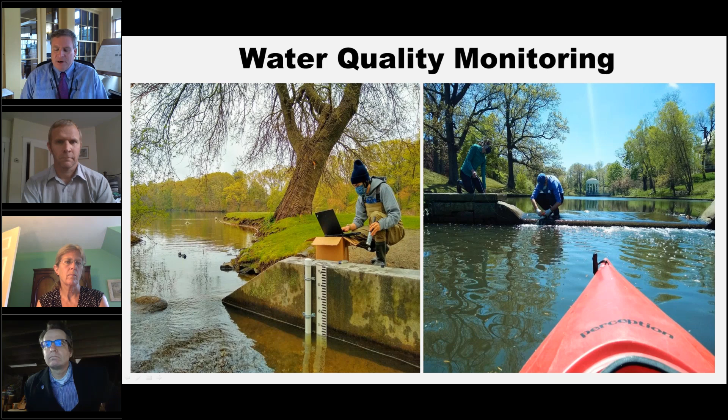Innovations in stormwater design. We want to know what you all are dealing with. If you're a landowner or a municipality, we want to know what you've done in your backyard or in your park to create better stormwater management. That's what it is, collaboration. We want to bring everybody's ideas together, talk with everybody about what they're doing, what they see. Send your information into us, and we'll bring it to a common place that's globally available to everyone. Then if you get a consent agreement, you don't have to start from square one. Hopefully we can get you to square 10 before you have to start your projects.

On the slide you're looking at now, to the right is the seal house. Way back when, Roger Williams Park Zoo had housed their seals and sea lions there, but the building cantilevers over the waterway. So a lot of our monitoring equipment is mounted inside this building, going right through the floor into the water below. It's a perfect setup for that type of testing, and it's been very successful. When they built the building back in 1893, maybe they had stormwater in mind, I'm not sure.

That will be a kiosk, not only for research, but for outreach to the public, for education. We'll bring students into the seal house, show them how it's working. There'll be video screens running with some of the stormwater things we've done and how they work.

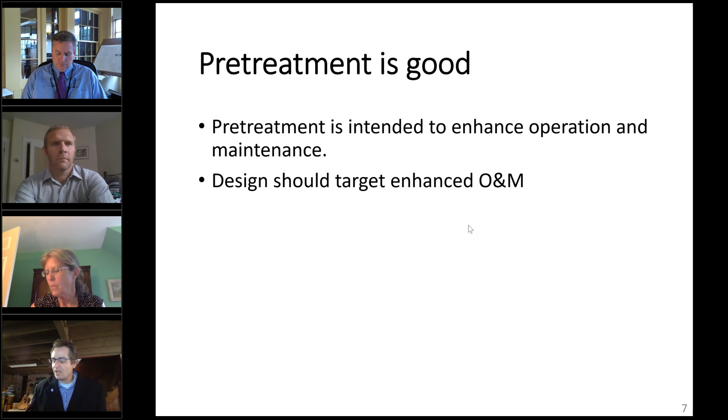So we've begun, in the scientific community, to become more flexible with what pretreatment looks like, and back off on some of the more standard requirements that it's got to be structural, it's got to be some type of basin. So things like offline catch basins are really good as pretreatment.

And if that's the case, then these deep sump catch basins serve our purpose for pre-treatment. They're easy to maintain, you can vactor them from the surface, and they have at least a 25% removal efficiency for total suspended solids, serving the purpose of pre-treatment. We've made those arguments in the past, especially where sites are tight and you don't have the luxury or the real estate to implement large pre-treatment.

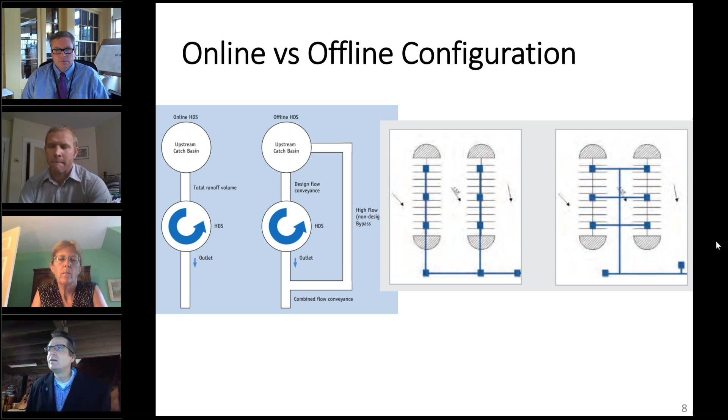If you're trying to maintain these street trees or tree filters in the cityscape, a lot of times they have grates that are difficult to remove, and oftentimes we don't have equipment for this. For the most part, our go-to maintenance is a Vactor truck, and you can't really do much with a Vactor truck here.

So this is one of the things that I think will happen over time. We are planning a maintenance course, and I expect we'll see innovations in maintenance tools as we understand the maintenance.

Right now, I think it's safe to say that in general, the go-to maintenance operation is just neglect. That's not everybody, but for the vast majority of stormwater treatment systems, I've written a bunch of operation and maintenance plans, and I know exactly where they go when we hand them over.

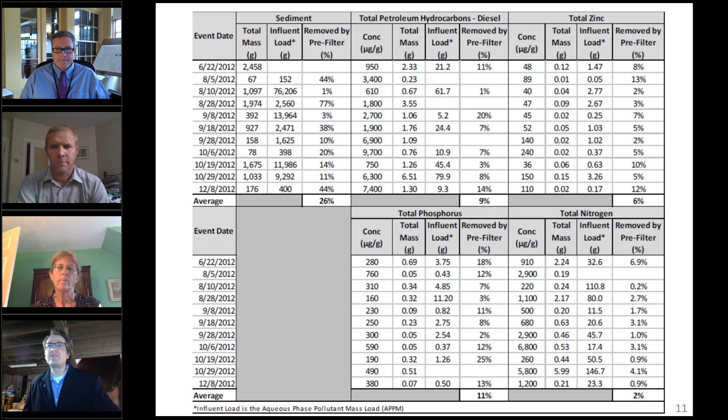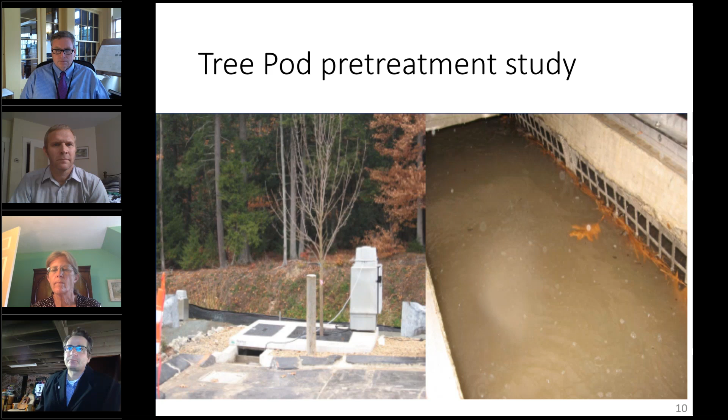So I'll move into, essentially for this, I am only going to be focusing on the enhanced treatment systems, what we would call filtration and infiltration best management practices or stormwater control measures.

For the most part, as we enter into the 21st century, if the state manuals haven't gone there yet, many of the local requirements, and particularly if you're from Massachusetts and New Hampshire, we have the pleasure of not having primacy over the Clean Water Act. EPA Region 1 does, and they've written our permit for us, which has some pretty stringent parameters around requirements for stormwater controls. For the most part, while they don't do it explicitly, implicitly they're requiring filtration and infiltration BMPs because they're requiring increased removals of sediment, phosphorus, and nitrogen.

If you're in the stormwater game, you've probably witnessed in your career this transition from a huge focus on TSS and sediment to now a larger focus on bacteria and nutrients, so nitrogen and phosphorus. We're a long way from where many of these manuals were written, and most water quality guidelines now focus on nutrient control. If you're coastal, it's nitrogen. If you're inland, it's phosphorus for the most part.

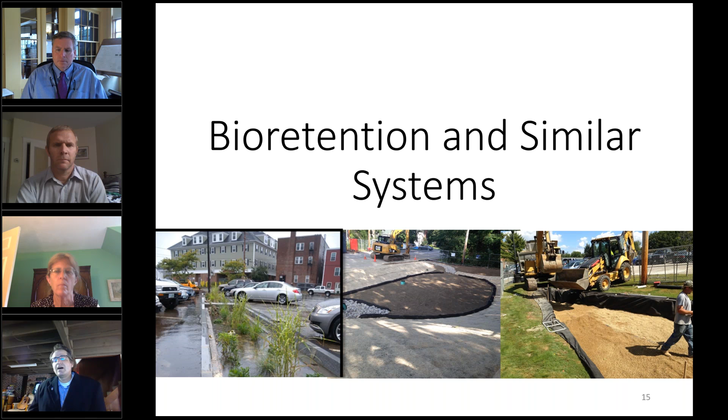Bioretention, I think, are the primary systems we see from a filtration perspective. Again, it's important to note that filtration systems are typically volumetrically sized, and they can infiltrate, and they may not. So they're versatile in that you can put them in areas where you wouldn't put infiltration systems, say areas with concerns about contaminated groundwater, or concerns about the general geology - it might be karst, or if you're in Pittsburgh, you're concerned with acid mine drainage, and nobody's putting water into the ground. In this case, these systems would be lined either with a compacted soil liner or an HDPE liner, but you still get the filtration function.

If you're putting a bioretention into a good soil and anticipating a lot of infiltration, that infiltration will really dominate the performance of the system. We see that the hydrology of these systems dominates the performance, and for the most part this is another area of research - there are lots of preclusions on infiltration, and for good reason, though there might be some over-conservativeness on that.

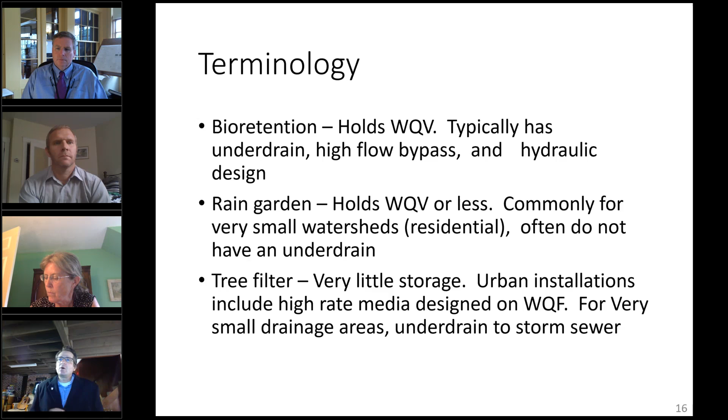So it goes without saying there's a lot of cooks in this kitchen. If you just Google bioretention design - and I do this routinely - you get 381,000 results in 0.03 seconds, and some of them are going to work really well. Our friends in Connecticut pop up very easily; they've got a really good, updated manual and standards. But you'll also see a range of different criteria. I don't know how many of them are tested. You have old criteria - some things work, some things don't.

So we're in a bit of a transition stage where we're replacing some of the old Maryland manual standards, because let's face it, for the most part, if you open the design manual from any state, you're seeing pretty much the majority of content that comes right out of the Maryland manual that Center for Watershed Protection did for Maryland, the birthplace of LID, 30 years ago. So not a lot has changed, although we're slowly updating the standards. But if you've been involved in updating a manual, it's not an easy task - you don't just write it and put it on the web.

All right, typically these are the components of the bioretention system. Again, you have a forebay - here we're showing a structural forebay. This is kind of like our own schematic, and cartoons are a little bit antiquated, right, because we're showing a structural forebay. I've already gone over the fact that we look at the forebay and pretreatment a little more flexibly now. It could be any pretreatment structure - could be a hydrodynamic separator, could be an offline deep sump catch basin. But whatever it is, that then goes into your main treatment cell.

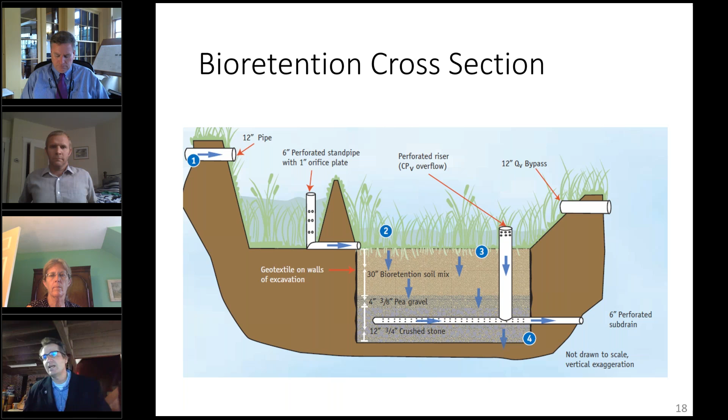Regardless, you have a reservoir, a place for water to store, and you can accentuate infiltration if it's routed through an elevated underdrain. So we play with the placement of the underdrains if we want to enhance infiltration. We do this even in soils where we don't anticipate a lot of infiltration, and I'll go into the reasons why later. There's really two reasons, and I'll cover that later.

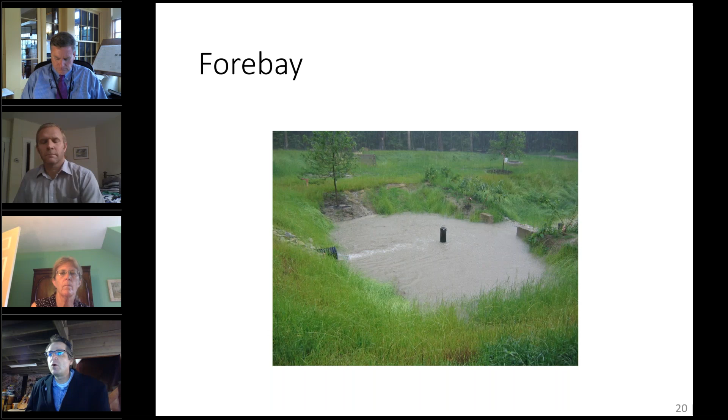So just cruising through some pictures, these are some of our early attempts at large structural areas that treat large drainage areas. This treats about an acre of impervious surface. We got rid of the forebay really quickly because we found it was very difficult to maintain, so we went for a low profile approach, not a huge structural forebay that was volumetrically sized. We just had a berm of stone that gave us separation and screening for the shopping carts.

We've also done some installations where we just have sheet flow into little bioretention planters. This particular one was done at a school as a way to save the playground. It actually was great A soil, but it had been compacted through all the little feet - think about recess, a bunch of mini compactors running around. It had really sealed off the top of the soil. You can see sparse vegetation out there from all that compaction and wear, and it just turned into a pond. So we put these little planters to intercept some sheet flow, and we gave the teachers their 20 minutes of free time, because when it rained and the playground flooded, they had to do indoor recess and didn't get their break.

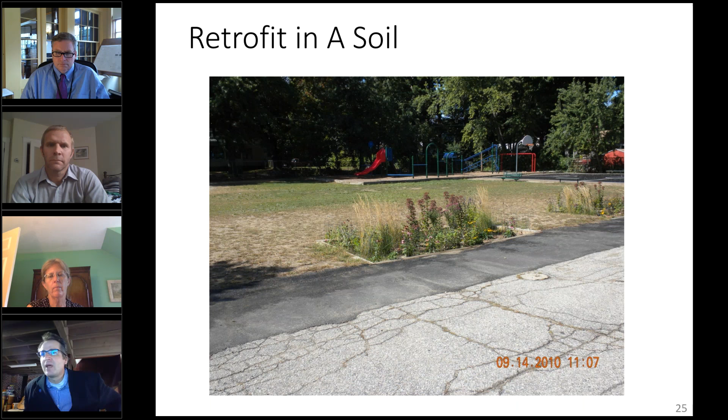Other things you see are these bump outs or curb inlets. This is happening a lot in large municipalities - New York, Washington DC, Philadelphia - putting these planters around the roadway. You can see here the issue we always see and struggle with: a very small inlet. We'll be hammering this when we do site tours at Roger Williams Park. You really need an aggressive slope because water does not like to change direction. It's cohesive, it likes to stay together. It does not take right-hand turns, so you really gotta coax it.

I love a drop inlet because gravity never fails. However, if you are having an at-grade inlet to your system, you have to make sure the opening is wide and the slope into the system is aggressive enough that water changes direction. This is a perfect illustration of what we see - this looks relatively new.

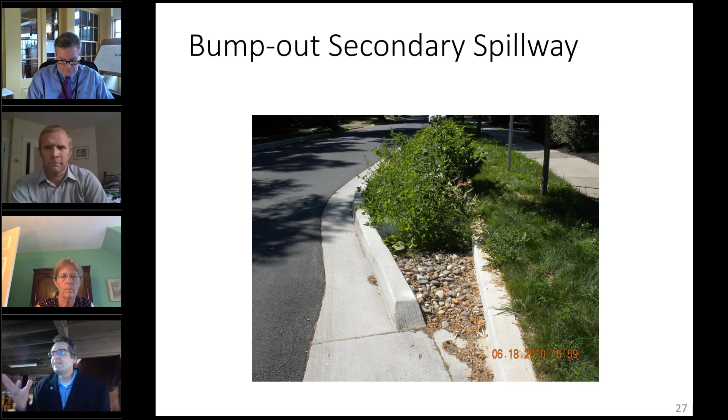That starts to intercept solids, debris, and creates a clogging front. My anticipation that water is getting into the system is very low. So these are very simple things that we can correct.

And the other thing here is, I can't really tell, but if I'm a drop of water, I'm looking at this grate and saying, that's where I want to go. I'm not looking at a huge turn, a 180-degree turn into the system.

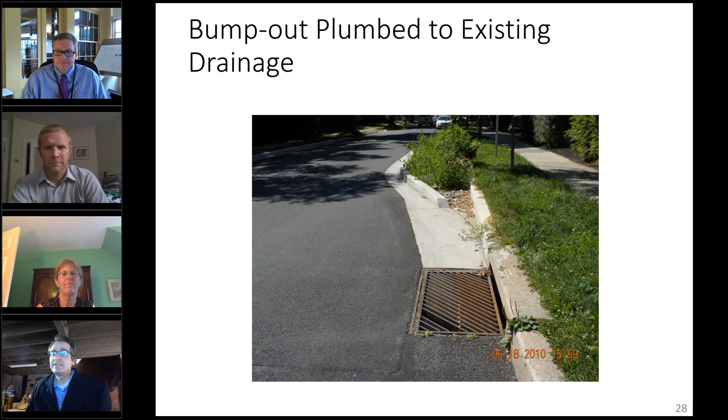Tree filters are out there. They are very simple in nature, and again, we're trying to do the research. Now, trees have lots of ancillary benefits. If I were to design something, I could not in my whole entire lifetime design something as amazing as a tree—something that produces its own food, sequesters carbon, provides habitat, releases oxygen. The list goes on and on.

However, we have not, in a stormwater application, pinpointed the exact functionality from a water quality perspective that the tree actually has. Obviously it's something, but again, the filtration component through the physical filtration through the media probably dominates the performance of these systems.

Tree specification as well is something that we're working on. Myself, we generally spec out a red maple. However, there are other trees out there that we'd like to look at—just not a lot of data here. We do have a publication that I'll link to you where we work with our urban forester to at least identify street trees that could be used.

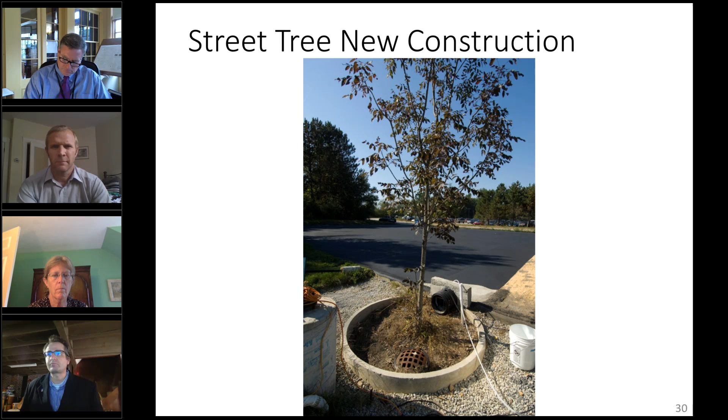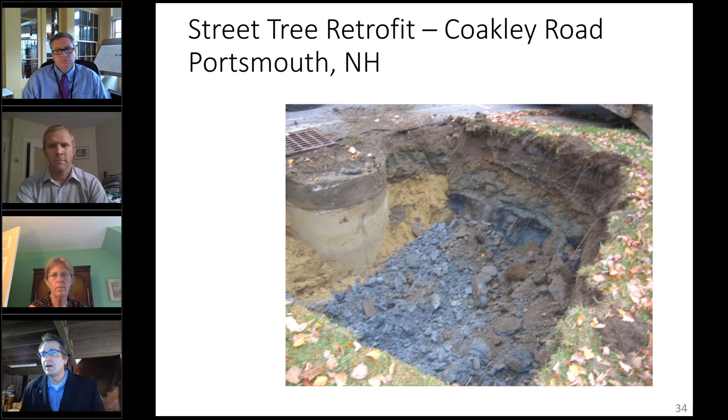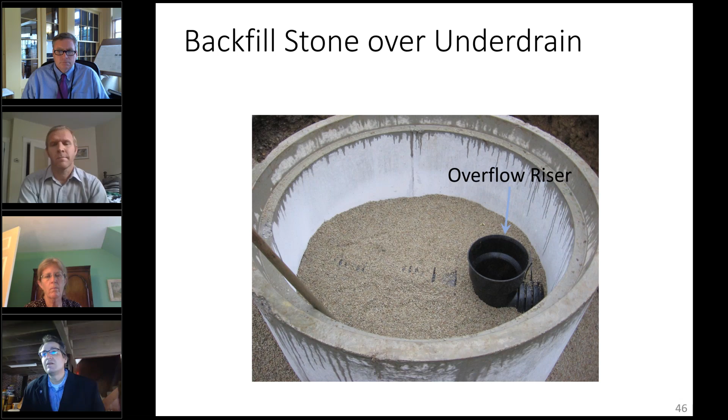And I just cruise through here. There's retrofit potential for these adjacent to existing catch basins. This is just an example of a very simple installation we've done, where we just dig out adjacent to an existing catch basin. We essentially backfill, or core into it, backfill with stone, drop what is basically a manhole riser, backfill that, connect it to the existing catch basin, backfill with stone, soil, provide our overflow riser, provide our inlet, plant our tree, and put a solid cover on the tree filter. We have done this in retrofit applications in order to enhance some water quality benefit into the existing landscape.

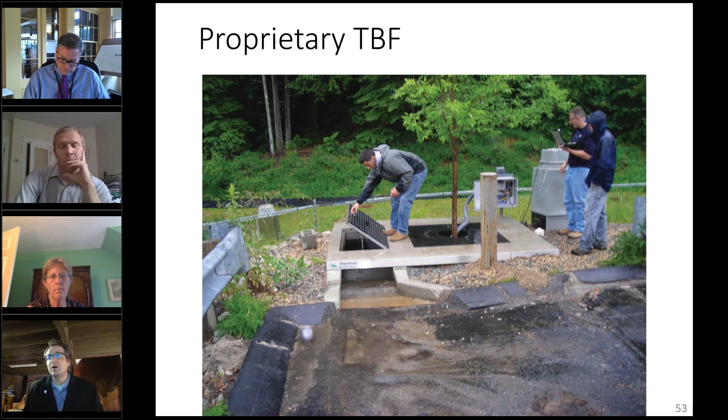And there are other proprietary devices that can do this as well. This in particular is a tree pod. We've also worked with cities to install large structures in the cityscape that again provide some benefit of a street tree, but also give an area for the tree to expand and grow and provide us some water filtration benefits. So those are just some examples.

Again, if you're using 0.05 inches an hour, this is not going to work out in your favor. But typically what we'll do is anticipate an infiltration rate and multiply that by 0.5, or take a factor of safety of about one half to build in some potential clogging. That is very, very conservative, I think, and you'll see why in a minute.

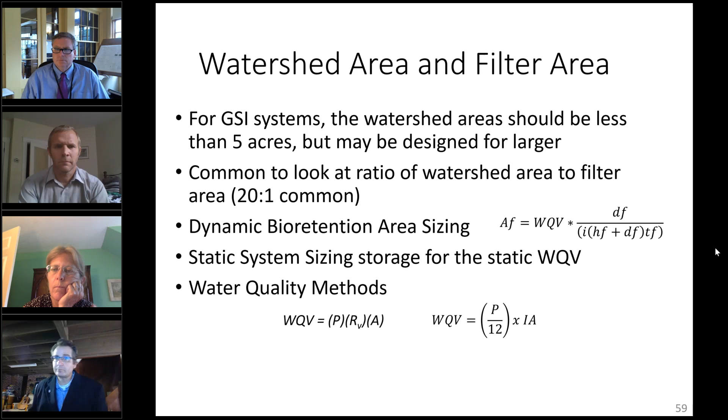So rights of ways, I covered this a little bit. In general, we're not putting these systems, if we're anticipating infiltration, in areas of high pollutant load, or we're lining them. There are lots of soil restrictions when we look at systems being installed according to some state manuals. I wanted to focus on slopes, because oftentimes we hear that these types of systems can't be installed in areas with significant slopes.

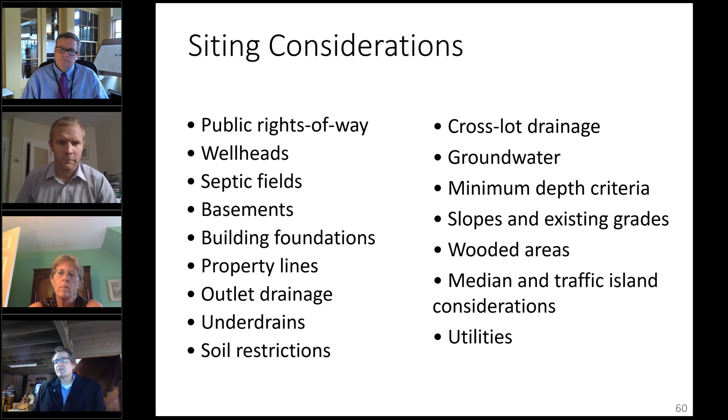We have installed them in the past. Generally, what we want is for the surface of the system to follow the landscape slope. Here, this is a roadway where we installed the bioretention. The top of the media follows the 3% grade on the adjacent road, largely to maintain a consistent system. Otherwise, if we kept the surface flat, we'd have a huge hole in the front and level out in the back, and we really don't want that—think cars being trapped in the bioretention system. Not a good photo opportunity.

So we like the top to follow the grade, but the bottom we design to be level, so the bottom gets terraced. While the top follows the grade, the bottom basically steps down. Here we have basically 3 steps down. The system is about 100 feet at a 3% grade. Every 33 feet, we go down a foot or so, and we just terrace it. So we have 3 basic bays here, and the bottom can remain flat.

We do that largely because what we worry about in terraced systems is concentrated and accelerated flow along the confining layer. The confining layer at the bottom of the system is where the stone meets the native soil. If you don't have restrictions there, you can get accelerated flow along that layer, causing pushing and piping and soil disturbance, which affects the integrity of our system. So you can terrace, or the other thing I've seen implemented is a geotextile, which does a great job at arresting flow—sometimes it's just a zigzag back and forth, backfilled with stone, creating a separation or internal check.

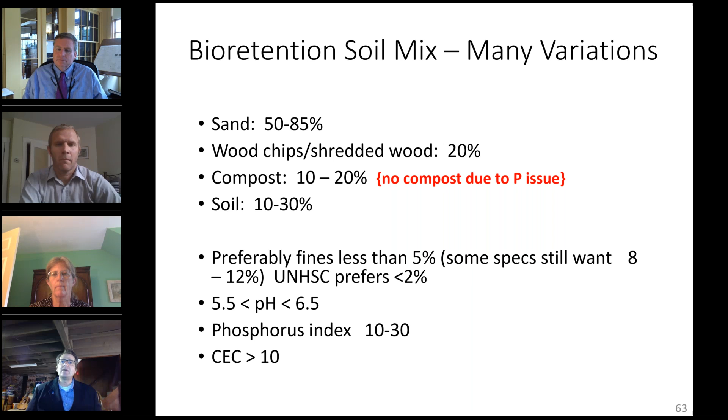And then we start to get kind of experimental with our compost loams and soil amendments. Sorry, I kind of skipped ahead of myself. Here's the particle size distribution we've developed. Again, this is on our website.

I might be able to show you that real quick. Let me see if I can do this. I'm playing with fire here. Playing with fire. Where did that go? No, I'm not going to do it, guys.

UNHSC, Google it, we're the first thing that comes up. If you go to our pub specs and info, we have detail on bioretention soil mix. It has some of the ratios and components, and also a particle size distribution that's a way you can test and make sure hydraulically that your system's going to stand up.

The last thing I'll talk about here is, I told you to get rid of geotextile in the vertical cross section, meaning the unmaintainable layer. If I put geotextile under 24 inches of bioretention soil mix, you're going to move heaven and earth before you get anybody to maintain that. You'll have to excavate your whole entire system.

Where this doesn't apply is when it's accessible or maintainable, such as in isolator rows in chamber systems. Oftentimes a woven textile is used in the isolator row, and that's fine. It does a great job of filtering. The woven textile is stronger and doesn't clog as readily as non-woven. We're finding it creates an organic humus on top as it removes organic debris and other things, which accentuates phosphorus removal.

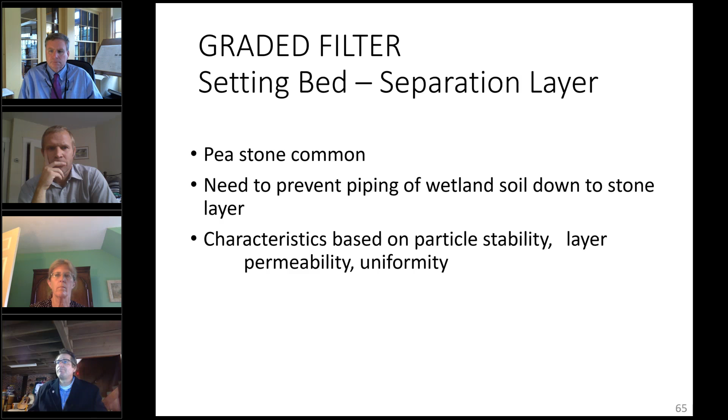What we use instead is a graded filter specification. This comes out of Federal Highway, and it's also used by the Army Corps of Engineers. It's basically an inequality calculation between your fine materials above coarse materials. If they satisfy these three inequalities, it can perform as a setting bed, meaning you can be relatively assured the fine materials won't pipe into the coarse materials.

Generally we use pea stone as an intermediate layer. So if we use a 3/4 inch stone or 2 inch minus stone as a reservoir, which is fine, we layer it with 3 to 4 inches of pea stone, a 3/8 inch stone, and that's worked really well as a setting bed. If you're not doing much reservoir, just use a 3/8 inch stone. If you got really nitpicky, a 3/8 inch stone has a void space of about 30%, and a 3/4 inch stone might have a void space of about 40%, so pretty much the same.

Now, amendments. Because of this phosphorus removal capacity and the lack of ability of these soils as we move them to higher flow rate and higher infiltration rate, that means we go from more organic material. If you think of a rain garden, a lot of it is 50% compost, 50% loam. That's going to have plenty of organic material, plenty of absorptive capacity, and it might even be leaching if that compost is not a low P compost. So what do we do? We don't want that happening in our phosphorus threatened waters. Now we have to look to some type of amendments.

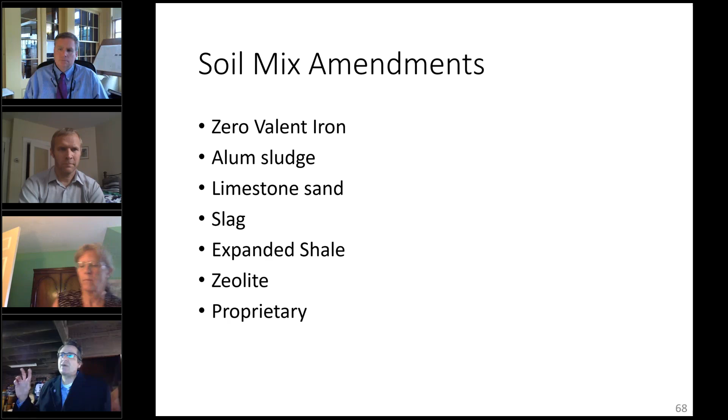So I'm going to cruise through this. This stuff is on our website, but these are some of the details for nitrogen. If you want to enhance nitrogen removal, what we're moving towards is what we call an internal storage reservoir.

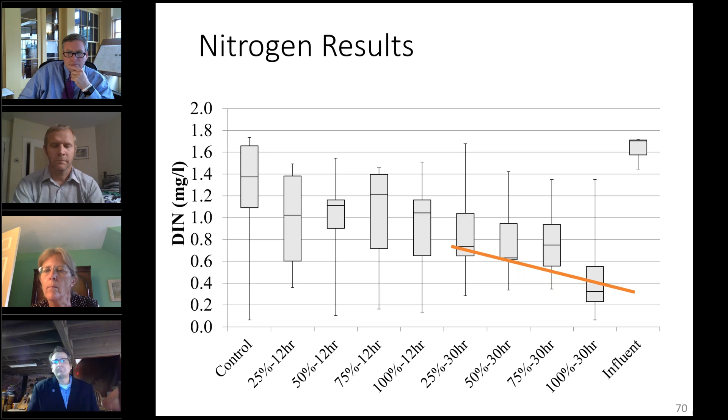So if we can hold it for longer periods of time, we get better removal, and we can shrink down the size of that internal storage reservoir. So we have a design specification for a hybrid bioretention system because we have nitrogen problems here on the coast, and so the criteria is enhanced nitrogen removal. And if you're in good soils, there's no way that you want to line that entire thing. So what we're building, and I don't think I have a picture of it, but again, it's on our website - what we're building is a first flow cell through what's essentially a subsurface gravel wetland in the middle of a bioretention system. I'll go over that a little bit more when we get into the gravel wetland.

We found water treatment residual and zero-valent iron to be the best. The slag and the limestone really didn't do much. We've also seen the use of expanded shale aggregate, and it all comes down to cation exchange capacity.

We've done studies on expanded shale, and what's interesting is they come from different parts of the country, and some parts have a higher charge than others. We found the stuff coming out of New York to be really good, with high cation exchange capacity and really good phosphorus removal. So something to consider: there are natural products that can be harvested and used that have this cation exchange capacity, which we're basically amending with the use of polyaluminum chloride.

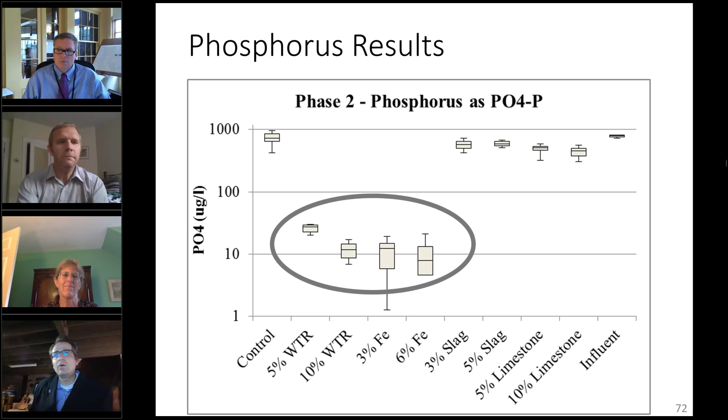Not to mention that it's a waste product. Again, if we can reuse it, the university and their drinking water treatment plant will give this to us all day long. So very good removal here. And then, like I said, we've seen about a 20 to 85 year adsorptive capacity with typical stormwater phosphorus loadings.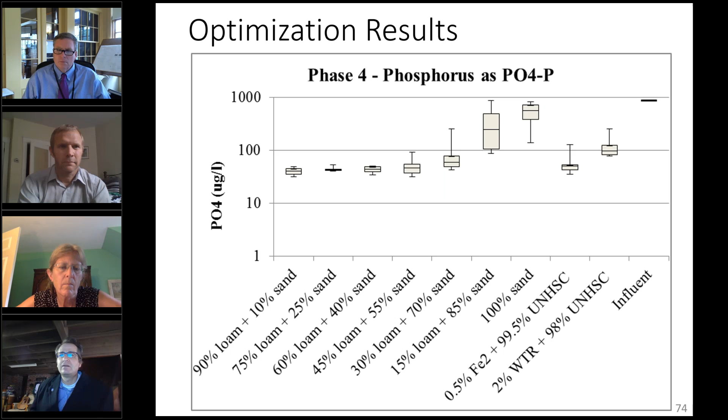Media thickness is often a question. Again, anywhere from 12 to probably 30 inches is what's most common. For the most part, because much of the physical straining is happening within the top few centimeters, you're probably sizing media thickness more for vegetation sustenance.

If you're using media amendments and you're increasing the residence time, you're largely doing that through some outlet control, like an orifice control or something in the outlet. You're not really designing that into your system.

And we're finding that those do well as long as we can keep the residence time in there. And we also see that nitrogen, and phosphorus for that matter, is very first flush weighted, meaning it comes off in the first 1/10 to 2/10 of an inch.

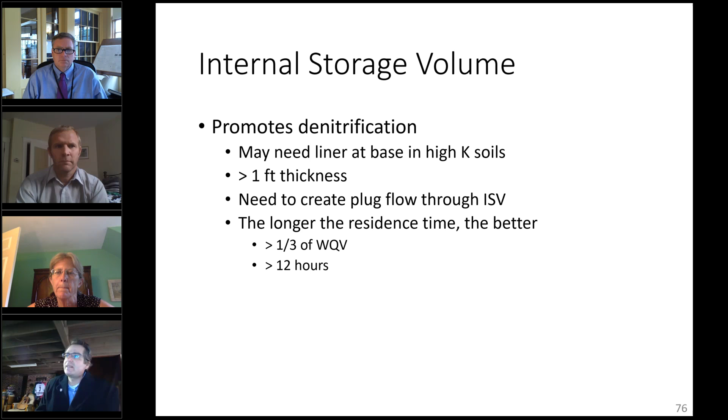So what the plumbing of that looks like is basically in your reservoir stone, you're just creating a saturated zone with an elevated outlet. Oftentimes, if you're in good soils and you're lining this somehow, not only in the sidewalls but also on the top, what we're doing here is trying to create plug flow. If you didn't have this liner in the middle, then water would come down and just short circuit this whole reservoir and go right to the outlet.

So here we're basically creating this flow path that runs linearly along this liner, which is installed at a negative slope into the stone, and then through 15 to 30 feet of flow through the saturated zone.

So again, we've installed 2 of these, but our Department of Environment is requiring them more and more for nitrogen control. And it's exciting to see more engineers get into the business of doing this. It's fun, it makes the design a little bit more interesting. And every time we install one, we learn a little bit more.

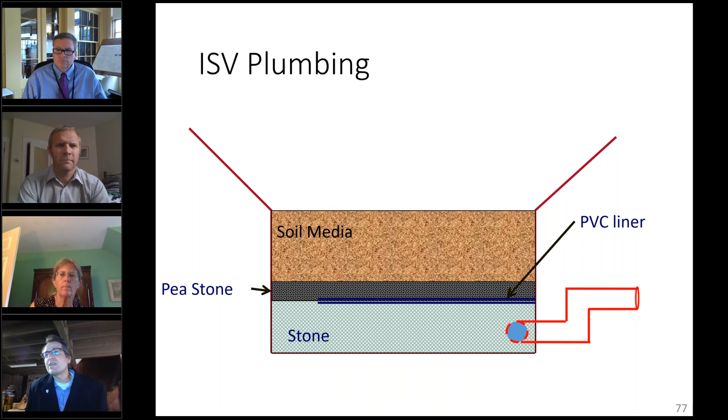Okay, to mulch or not to mulch. I think Roger Williams Park is a no mulch facility. Is that right? Yeah, so I'm in the no mulch camp. There's plenty of people I know that are in the mulch camp. I think it depends on your area, the level of maintenance you want to do, and how your crew is set up for maintenance.

The thing is, for my purposes, I'm usually designing larger systems that treat larger areas, and no matter whether the mulch is triple shredded, quadruple shredded, hardwood, softwood, wood floats. And so if we're directing a lot of flow into an area, we always see that mulch shift and push, particularly to the back of our system where our high flow bypass contingencies are. You can see some of that happening here. This isn't even a mulch system, this is just normal debris from some of the vegetation, from some of the organic material that's been collected in here, pushed to the back.

And it's usually why we use beehive structures as opposed to flat structures on our high flow bypass controls. If you use a flat surface, then you have a one dimensional clogging front. If you use a dome, you have a multi-dimensional clogging front. So you can see I'm clogged here, but as the water rises, it's going to access flow because of the dimensionality of the dome. So something to consider.

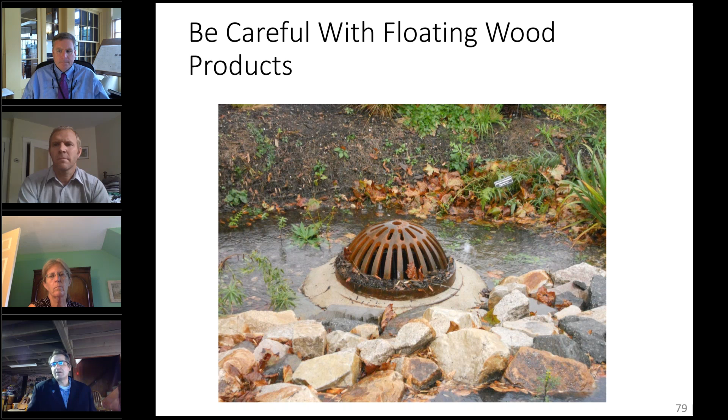Drain downtime is another design contingency. Oftentimes we see bioretention systems, people wanting to use bioretention systems for also peak flow control. So it's possible that you're building a larger basin, a smaller filter area within a larger basin, and you want to allow for more storage depth above the filter.

In general, we see ponding depths of anywhere from 6 to 24 inches. If it gets above 24 inches, then you're doing two things. One is you're potentially changing what types of plants might occupy your system. They need to be able to withstand that inundation. Two, you're also creating a driving head that could push material through your filter system and push some of the fines out of your system.

We did design a sand filter with a 6-foot ponding depth, and I wouldn't recommend it. It didn't get very good performance, and we felt that buildup of driving head pushed stuff through that filter and led to lessening of the physical filtration capacity. So 6 to 24 inches in general. There are instances where you might be able to get away with more or less. I think at that point, it's just engineering judgment.

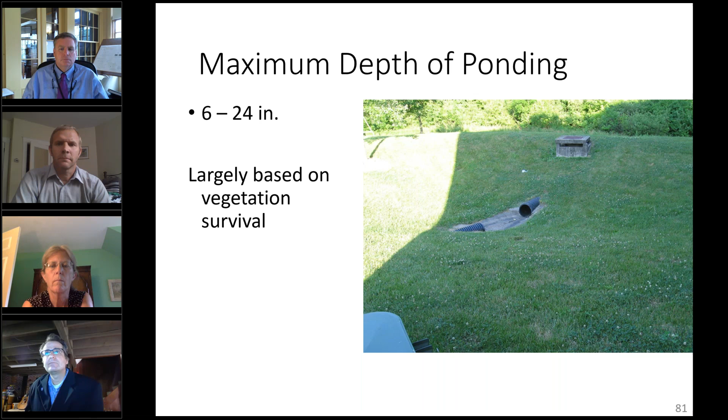I skipped over drain downtime. Typically, we use a 24 to 48 hour drain time. For the most part, whatever sizing equation you're going to be using is likely going to be really conservative, and your system is going to drain far quicker than your infiltration rate times 0.5.

And then vegetation. So I've really taken a laissez-faire approach to vegetation. My point would be, I'll take whatever I can get. We're so behind in stormwater management. I kind of feel like if you want to grass it, great. If you want to plant it, great. I guess to some folks it sounds like I'm a plant hater or something, but I just think we need to do more. I will illustrate some of the lack of detail, though, that's out there.

There's not a lot of good sources for information on plants. In our manual, and I can pick on New Hampshire, when you go to the 2008 design manual, for plant selection, it tells you to use this national list of plant species that occur in wetlands in the Northeast. These are facultative wetland plants. And I guarantee you that none of the plants that you select here will survive in bioretention systems if you're designing it to the updated specs for soil, because if your system is 50 to 85% sand, it's virtually a desert to facultative wetland plants.

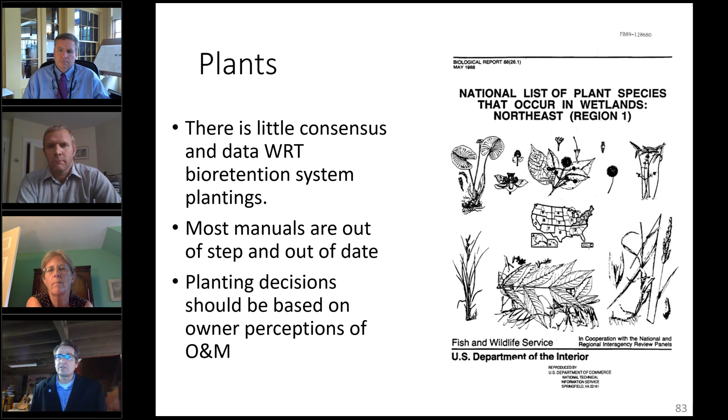So there's that. For trees, I put our link here. If you go to the front page of our website, we have a new report online with our urban forester that identified different tree species that could potentially be used in these tree filters. That's something to take a look at.

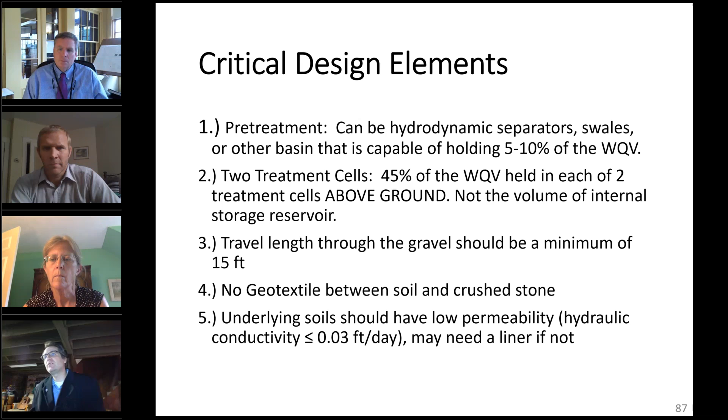My thought is it's going to function virtually the same. But again, oftentimes permitting agencies want data, and we only have data for a 2-cell system. And so that's really what it looks like.

So you have 10% of your water quality volume in the pretreatment. If you have offline deep sump catch basins, then you're just sizing these 50%, 50%, or 100% in a single basin system. The important thing is the water quality volume is stored statically in the basin geometry.

So the geometry above the wetland system - this is the common area that we see - because essentially your stone layer is saturated due to an elevated outlet. So this elevated outlet maintains a water level at the top of the stone.

It's conceivable that you have some void space in your soils, but oftentimes we're also calling for wetland style soils. So we're not anticipating vertical infiltration through the soils - that would largely tend to short circuit our plug flow.

So we have some type of hydraulic inlet at the front. Here, it's a perforated standpipe. There are other configurations I'll get into, and we want water to flow down into the system, down through the system and horizontally through the saturated stone.

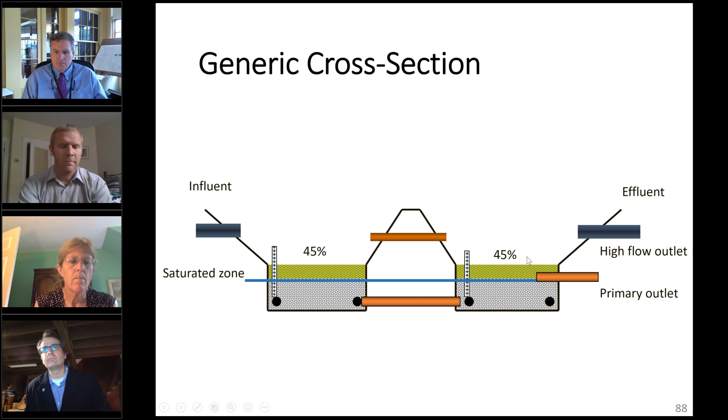So another picture of how this looks. The hydraulic inlet can be a perforated riser pipe. Generally, we don't perforate it in the soil, and then it's perforated in the stone, and there's some headers or distribution lines. We've also adopted a second strategy, and I'll get into that a little bit later.

For the most part here, you've got 2 feet of gravel, you got wetland soil on top, you need a hydraulic inlet, and you need an outlet. Everything else is really, really easy for these systems. You're statically sizing water quality volume in your basin geometry, and that's about it. So it's as close to pond design as you can get. The only thing you're doing is building the stone reservoir and sub-base components of your pond, but everything else is the same as building a pond outside of the inlet and outlet structures.

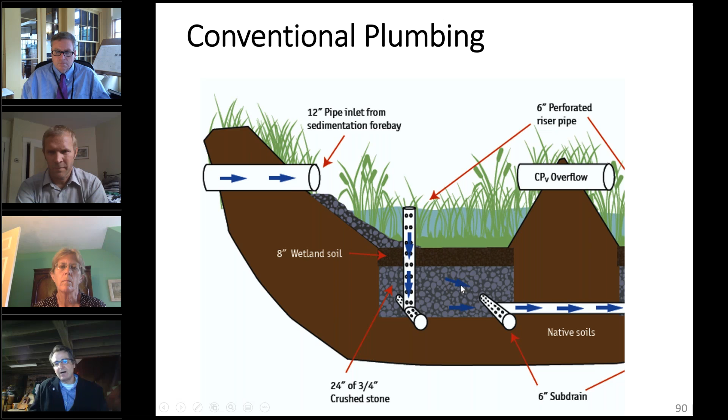I'll get into that a little bit. So you need some type of way to get water into the subsurface. Again, we're specifying a wetland style soil, so we're anticipating that over time this is going to seal up, and we really don't want this to function like a bioretention. We don't want the soil to allow water in - we want the hydraulic inlet to convey all the water.

What we've done since, because we do have some maintenance issues around standpipes - they tend to accumulate, especially in the pollen seasons, gunk and other confining materials in the holes - we typically go with a drilled as opposed to slotted pipe. We find those work better, but often they can be clogged as well. So typically we put those in as a backup, and our primary hydraulic inlet would be the spillway.

This is on our website, updated in our new specification for gravel wetland. We have our stone, our intermediate pea gravel layer, our wetland soil, and then around the influent spillway we have rock armoring, like a rock apron or riprap apron, and below the riprap, above the pea stone, we have a woven geotextile.

Now, this is a maintainable layer. So what I can do is every 3 years or every year, depending on the land use that this is treating, you basically pull back that riprap, pull out the woven fabric, and replace it. That's been a manageable maintenance operation for these style of systems, and I like the way it really does maintain the type of plug flow that we want.

Then we have the standpipe as a backup. So if we don't get out there as routinely as we want, we still have a secondary hydraulic inlet. This is kind of our go-to design now for the hydraulic inlet, hydraulic outlet.

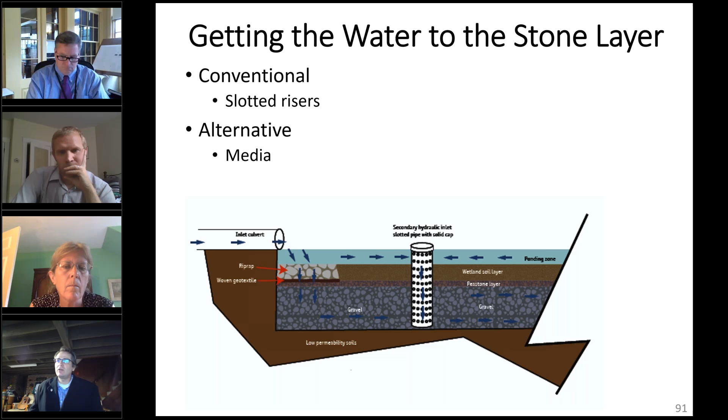We've learned a couple of things. One is, if we're really looking at long-term and life cycle, we would like to be able to drain that saturated zone. So this outlet is elevated, but we'd like to have some type of bypass weir that we could potentially lift up and remove.

So oftentimes this is taking the form of an outlet structure where we drop a weir basically in that can be removed periodically. And when I say periodically, I mean you'll know if your system is clogged by your inspection, and you could remove that weir wall so you could potentially flush out the system if there's like a floc or something.

We have successfully clogged a subsurface gravel wetland when we did a propylene glycol study for an airport. We loaded propylene glycol, which is basically sugar, and the BOD went through the roof. That system just went into high gear and produced like a biofloc, essentially, that just clogged everything up. So we were able to take out that restrictive outlet and flush the system out into like a dirt bag or other retention device, so that we weren't discharging that to the wetland - so that we're okay there long term.

And then the other real issue here is protecting the outlet. So I'm going to show you a picture first of what not to do. This is one of our original outlet structures. You can see the weir wall in there. We have a plug here that we can remove to drain the wetland, and then we have an orifice for control that you can't see in the actual weir wall.

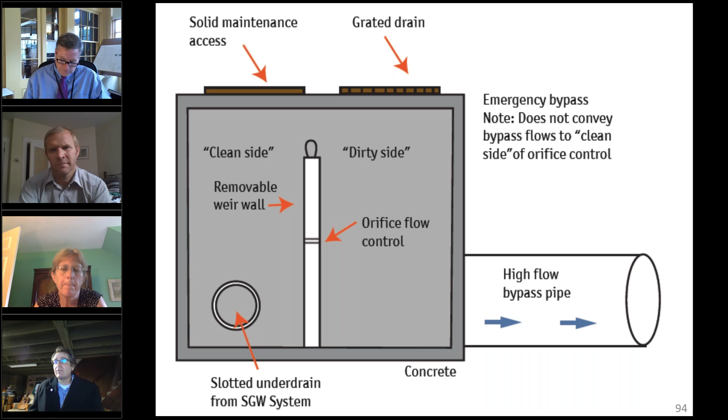So you want to keep this clean, only receiving water from the filter area, and the dirty side then has your grated inlet. It's the only real advancement to this that I've seen. Otherwise, a large outlet structure like this really works well. And the outside of the inlet is the only other design constraint. In between, it's just a hole with gravel and some soil.

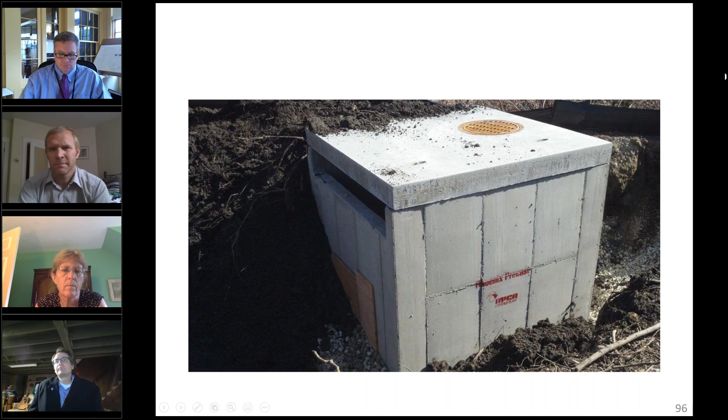Additional details here. Again, a ponding depth is generally 18 inches. In some retrofit capacity, it could be more than that. For instance, if this were retrofitted into a detention pond - and someone asked, can detention ponds be retrofitted? Absolutely, we could put a gravel wetland right down the middle of a detention pond to convey the water quality flow. Since the inlet and outlet are at the same elevation, this is highly suitable for retrofitability.

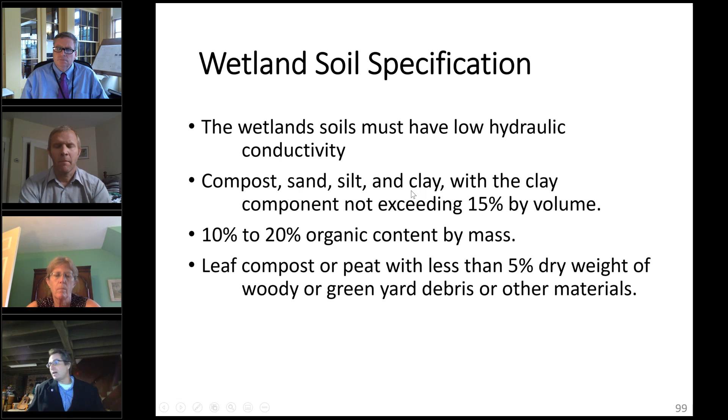Wetland soil specification is something we've struggled with. New Jersey developed a spec for wetland soils, and we worked with them on that, and with some wetland scientists as well. The idea here is something high in organic material. We're not worried about physical filtration, so it's not majority sand. It can be made of all kinds of different material, including native cut from your project.

We have developed a particle size distribution for the wetland soil. We found that originally in our spec, we had a hydraulic conductivity spec, 0.1 to 0.01 feet per day, and it's nearly impossible to spec. So what we developed in order to spec this - what we were seeing was high variability in materials. We saw people putting, like, just hauling out wetland material with large logs in it.

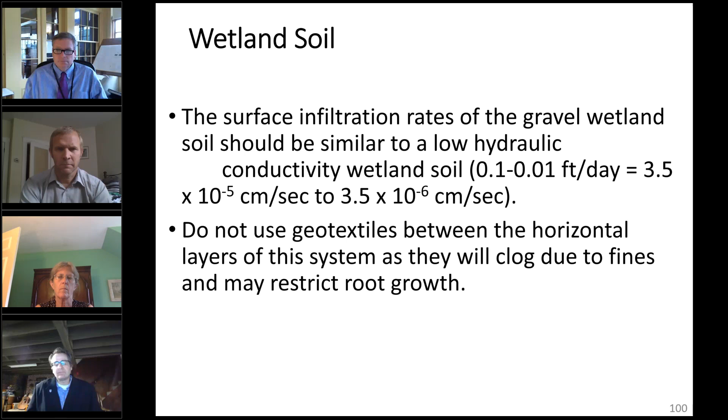The idea here is that you don't have a particle size that's large enough to bridge the entire depth of the soil, to bridge the top with the stone surface. So if you have large logs that basically bridge from the surface to the stone, that potentially short circuits the system. So what we did is we came up with a particle size distribution. This is in our spec that, again, is easier to specify and easier to source.

Again, much like where we went with the bioretention soil mix, this is a performance-based spec that is cheap. PSD tests are cheap and readily available.

Okay, vegetation. Again, with our first gravel wetland, we went with all kinds of wetland plants. We had a 53% die-off rate of our plants. So we spent about $20,000 on different plants, and $10,000 just went out the window. What we're advocating for now is a wetland plant mix - it's about $125 per pound, which will blow the contractor away. Our contractor could not believe it, he thought these were like illicit drug prices. But we've had great success with this.

The conditions here - there should be a reservoir of water available in the subsurface, but not every potted plant or wetland plant actively establishes itself in these systems. It's dry, intermittent storms, so you really have to be robust and develop good feet and roots to be able to tap into that wet reservoir. So I've even advocated for folks to just grass it, stabilized with like a contractor mix, and then generally species will volunteer.

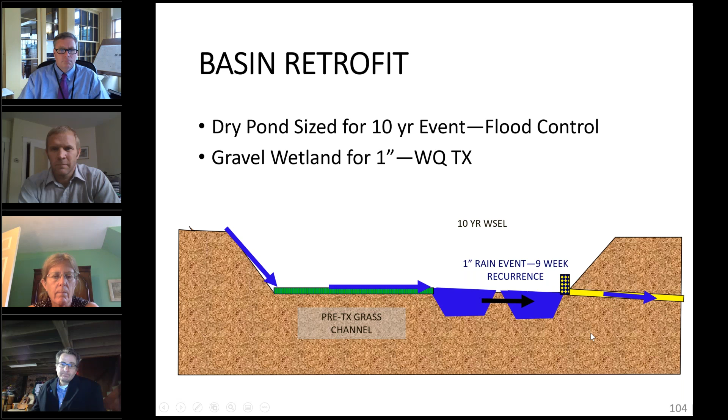All right, so we got 40 minutes left. Any burning questions, Meg? There's only one that's come in since we did the other ones.

What are the key treatment and maintenance differences between a subsurface gravel wetland and a wet vegetated treatment system?

Good question. A wet vegetated system, I'm not sure what the maintenance criteria are for that. My guess is you develop a wetland system and pretty much leave it alone. That's where the subsurface system lends itself to maintenance, because it has a dry surface where you can get equipment into. So a wet basin, outside of pulling out invasives and making sure there's no hydraulic restrictions, I don't know what you're doing to it. Presumably, like in a retention pond, you're dredging sediments periodically every, say, 5 to 10 years. I haven't seen the same maintenance criteria for a wetland surface system.

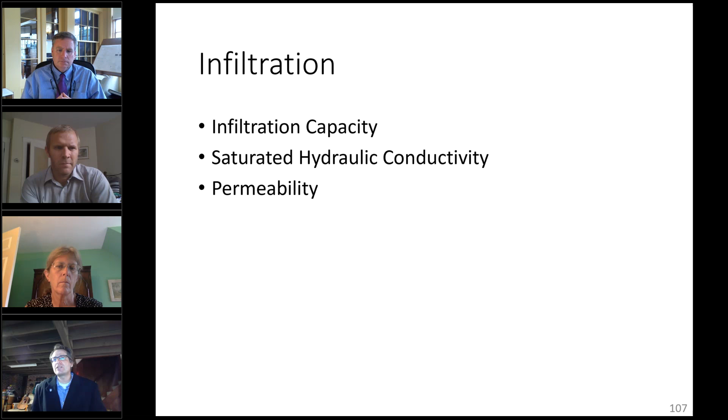That said, there are some conditions around use of infiltration systems that we have to consider. Now, for the most part, we're using a web soil survey - USDA is probably the go-to resource. They have a web soil survey where you can locate any region in the country and get up-to-date information on soil type. Granted, this is coarse, and it seems like it's been good enough up till now for design, but we always recommend geotechnical investigations, because you're always bound to be surprised what's there versus what shows up on the web soil.

One of the things I see, and I haven't really had a solution to it, but it's potentially problematic moving forward, particularly for new development and redevelopment, is many state manuals have preclusions for use of infiltration in higher KSAT soils. In New Hampshire, I think we cannot infiltrate in A soils that have a saturated hydraulic conductivity greater than 10 inches an hour. That's rough - that takes a big tool out of my toolbox. In Maine, it's even more restrictive, it's 2.56 inches an hour.

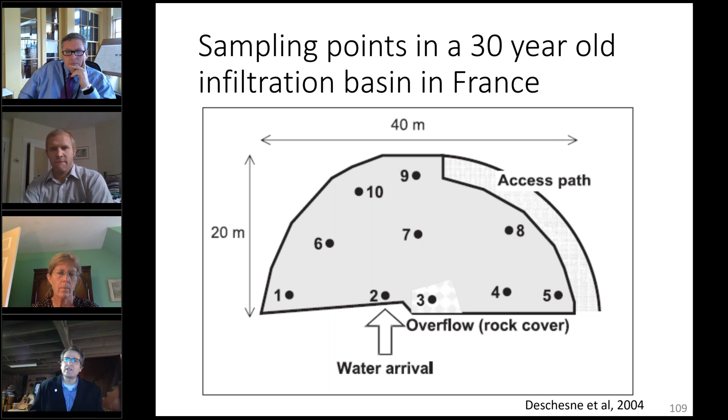There's not a lot of data on stormwater infiltration systems. I did find this study where a 30-year-old infiltration basin was studied in France, and they looked at pollutant concentrations at various points, not only within the system but outside the system. They largely found, with respect to metals, that within roughly a foot in both the vertical and horizontal, those pollutants reduced from relatively high concentrations down to background conditions. That's what you're seeing here, within basically a foot of depth. So you have high concentrations on the surface, and then within 0.3 meters, roughly a foot, you see a reduction down to baseline conditions across the board.

I anticipate this story looks similar for metals and any other sediment-associated pollutant: hydrocarbons, sediment, phosphorus. Where I don't think it holds is with respect to dissolved pollutants like nitrate or chloride. So here's the big contingency: if you have chloride impairments or nitrogen impairments, you might want to think more carefully about discharging water into the ground if those are your problems. Other than that, I think most pollutants are conservative and are demobilized within a foot or two of the system.

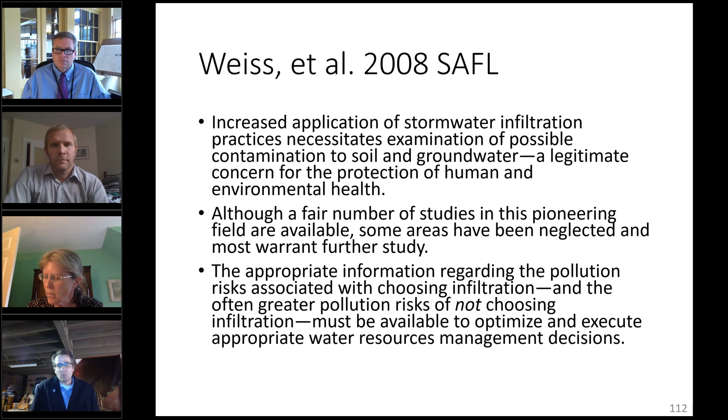That said, we're not putting infiltration systems in brownfield sites. We're not putting infiltration systems at gas stations or areas of high potential pollutant load. We're not putting infiltration systems adjacent to architecture that has a risk of flooding out. We're not putting infiltration systems in areas with acid mine drainage. We're not putting infiltration systems in areas that have karst geology. So there are a lot of real preclusions to infiltration that we have to honor.

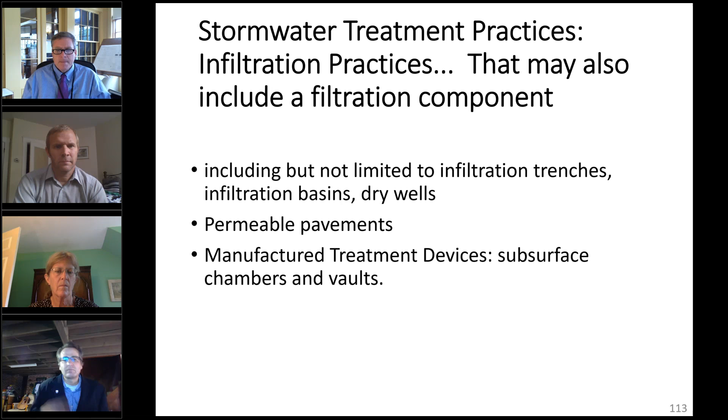So that's kind of the background. I know I'm going kind of fast here because I'm looking at the time and I've got 20 minutes.

I did want to talk really quickly about infiltration trenches because there's a permit trigger here. Infiltration trenches are defined by EPA as those systems which are deeper than they are wide. Most infiltration trenches are narrow, deep reservoirs, and if your infiltration system is deeper than it is wide, it is considered by EPA to be a Class 5 injection well. I am not entirely clear what that means. I know it's an elevated permit threshold, but for the most part, I think you have to report it, and it goes on some list somewhere that I've never seen.

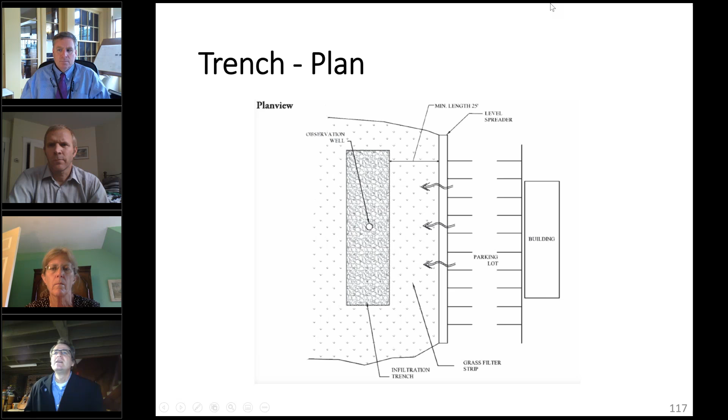So, you know, it's not that simple, obviously, and I don't mean to make light of this, but there is an additional permitting step of a Class 5 injection well if you're installing an infiltration trench. That said, EPA has considered green infrastructure, like bioretention or bioswales, as long as it has a vegetative component, to not trigger Class 5 injection wells. There's a memo, I think from 2011, from EPA that basically precludes a lot of green infrastructure like bioswales, that could be deciphered as an infiltration trench, from triggering Class 5. That's the note on infiltration trenches.

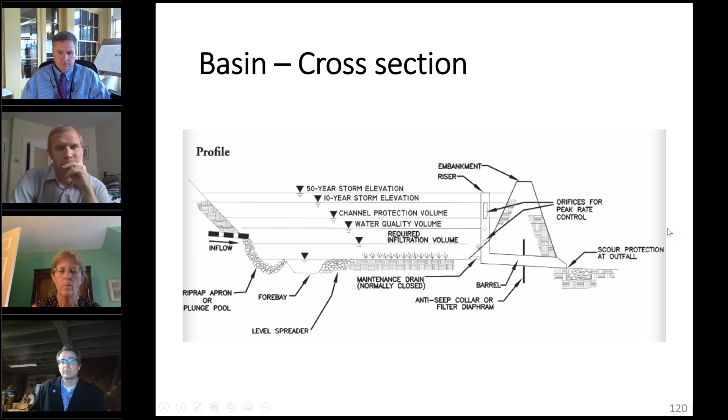So I'm going to scream through here. Again, infiltration could take the form of a basin. It could have some soil media, reservoir or not, discharging into good soils potentially. It could be subsurface chambers or subsurface pipe. For the most part, these designs are blind to what creates your void space.

Your void space could be in a basin, it could be in stone, it could be in soil, it could be in chambers, it could be in concrete, it could be in these milk crate structures. If you've seen them, they're these stackable structures that allow for load bearing capacity, but also create tremendous void space at lower cost.

Whereas stone, for the most part in the Northeast, we use exclusively, but it's also relatively cheap. As you move more and more south, it gets more and more expensive. It's possible some of these HDPE products or other prefabricated products give you a better dollar per void space delivery.

Most chambers that go in, chambers are kind of taking off. That's a subsurface system because they're very easy to install. For pipe systems, you need a crane. These large diameter pipes are hard to ship and hard to install. Same thing with large corrugated metal pipes, hard to ship, hard to install, special equipment. These chamber systems can be stacked and installed by two people.

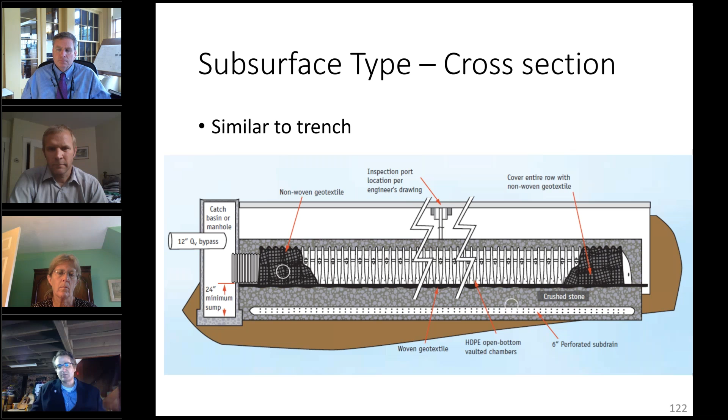Oftentimes there's some type of field assessment, and this area has really exploded - geotechnical investigations and assessment of infiltration capacity of native soils. Back in the day, we used to have the double ring infiltrometer, and if you've ever spent time using one, you know the issues. It takes massive amounts of water. If your soils are even slightly restrictive, it takes hours. For the most part, we've had permeameters come out, and there's all kinds of other updated field measurements that are quicker, require less water, and really accelerate, giving you accurate, repeatable infiltration capacity.

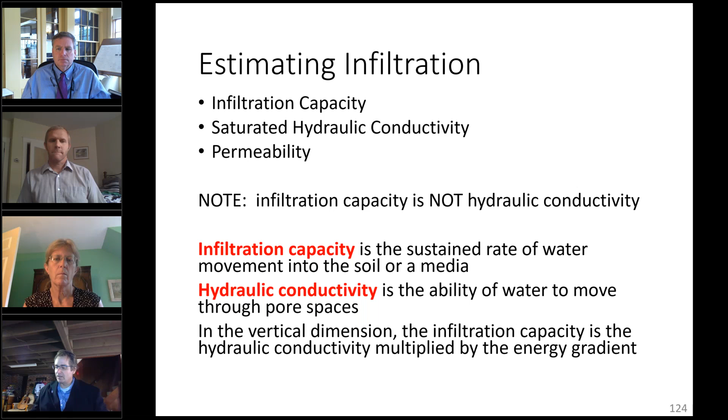And again, I would say the more site-specific data you have, the better. Just relying on USDA soil maps is not really great, and it's no longer really acceptable when siting infiltration systems.

All right, permeable pavements. Permeable pavements are innovative. We've used them with great success outside of the poured in place pervious concrete in the Northeast, and they're relatively inexpensive. A lot of the expense is on the additional site maintenance or the site excavation. For the most part, most pavements go in on a sub base of maybe 18 inches. Typical porous asphalt is going in with a minimum sub-base depth of about 30 inches.

So that's where a lot of the costs really are. Materials-wise, for the pervious pavement versus the dense mix asphalt, for the most part it's about 20% more. But it's also doubling as your stormwater management strategy, so your pavement surface is your pond.

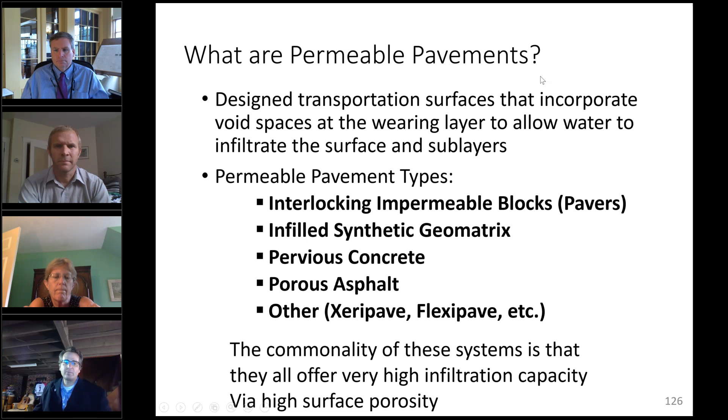And they say within the first year, but when we started out, it was 30 days, then it was 90 days, then it was 120 days, now it's a year. And we just haven't seen the long-term evidence that it's going to cure appropriately prior to the application of salt, which again destroys the alkali silica reaction, goes on forever almost. So there's no real definitive point at which you're successfully cured and you won't be susceptible to spalling from chloride application. I'm gonna have to cruise through this.

There's a lot of information out there if you're looking for design specification. We have a specification, so does NAPA. If you're looking at pervious concrete, like you're in the South or you're doing something that's not going to be salt applied, the ICPI, the Interlocking Concrete Pavement Institute, will nearly design the thing for you, especially if you're from the Northeast, because they're looking to get—sorry, that is permeable interlocking concrete pavement, which is different. Those are pavers. Those have no susceptibility to salt because they're not porous themselves.

Where the porosity is in the joint space in between the pavers. So these are really nice. They're aesthetically pleasing. There's a lot of online support, again, from ICPI. And we've monitored installations for years and they work well.

Interestingly, we actually had a site where it was set for a full-scale reconstruction of a building on campus. It had a permeable interlocking concrete pavement driveway and parking area. They pretty much, during reconstruction, pulled up the pavers. We had them pallet them and store them, and then we actually put them back. So kind of an interesting anecdote—these things can be reused, and we did that pretty successfully.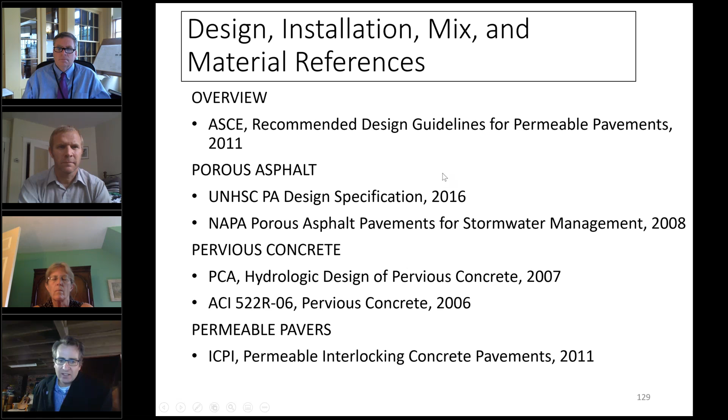So common pitfalls are less in the design for porous asphalt and more in the installation—that's where we see the issues happening. And again, maintenance—oftentimes things don't get maintained. That's another pitfall. We have successfully rehabilitated these pavements though, and I'll show you some data on that. It's just that rehabilitating the infiltration capacity is obviously more expensive than doing routine maintenance. So an ounce of prevention is a pound of cure.

So I talked a lot about where to use and not use any infiltration system. Same thing applies. When I look at a porous pavement system, it's no different than an infiltration system. It's just that our surface, our wearing surface, is our hydraulic inlet into our system. So it's really no different than a subsurface chamber—it's a different hydraulic inlet, but the properties of design are pretty much the same.

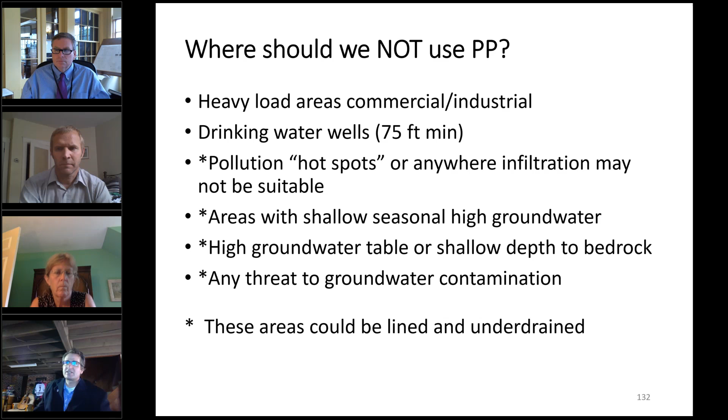All right, I'm going to kind of cruise through this just for lack of time. For the most part, some of the cold climate considerations are depth of subbase materials. We usually use the 2/3 rule—the total system thickness should be 2/3 of the max frost depth. Max frost depth here is generally about 48 inches, so our subbase is about 32 inches, and that's really the design constraint. So when we look at storage capacity within the void space of that 32 inches, it's massive and immense. So if you're in southern climates or you don't have this frost depth penetration requirement, then you should be sizing your subbase again to store your volume—your instantaneously generated water quality volume.

Lots of questions out there on porous pavement. I'm sure I'll see them in the chat, and hopefully I'll leave a little time to get to them. No, oh, it's 11:54.

We have a whole specification on our website. If you're interested, it walks you through the design, the installation, and some of the oversight that needs to be done. Primarily, oversight is maintaining infiltration capacity of your reservoir course and its temperature thresholds.

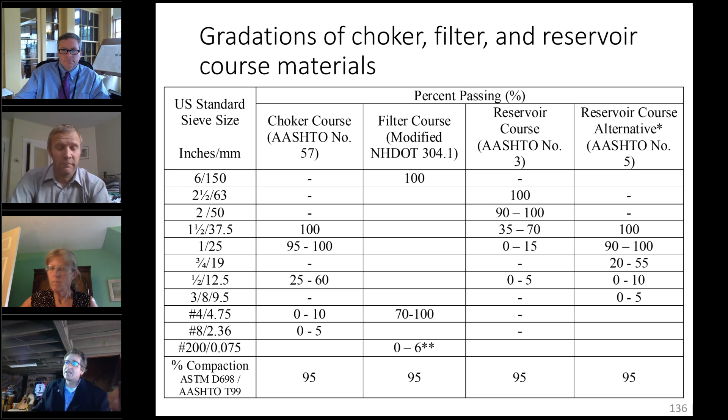The asphalt binder cools a lot quicker because it has less thermal mass. If you think about it, the aggregate you're using eliminates pretty much any of the fines. So there's no sand, it's a coarse open graded aggregate, and thus it cools really quickly. That's really what we're always combating during installation.

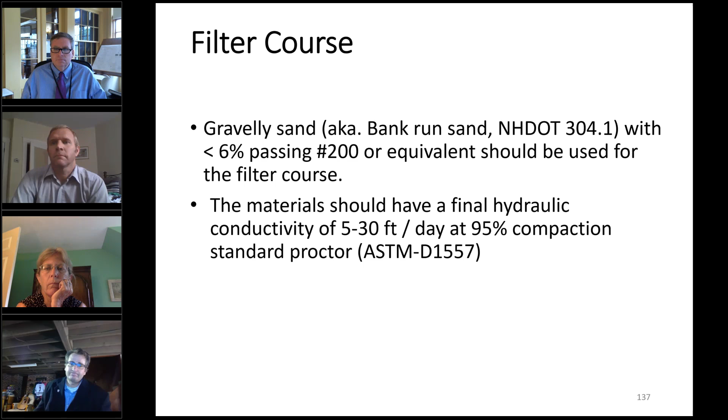A contractor that doesn't know what they're doing will line up the trucks, because that's what you can do with dense mix asphalt. For porous asphalt, within an hour and a half that stuff starts cooling, and once it gets to a certain temperature - about 165 degrees Fahrenheit - you really can't. You should be rejecting the mix, because that's around cessation temperature. It's not going to compact. And they do not like it when you reject a mix.

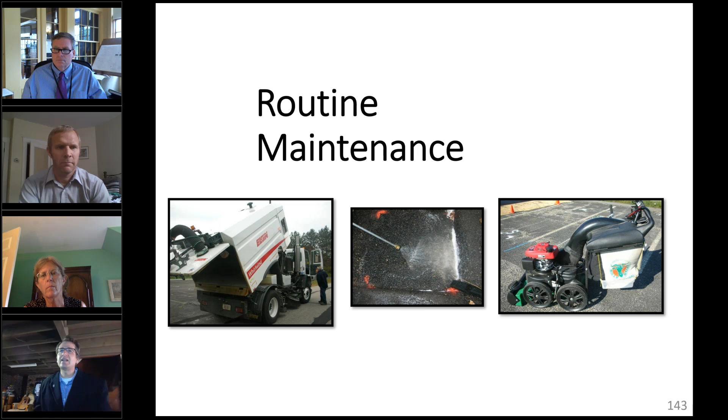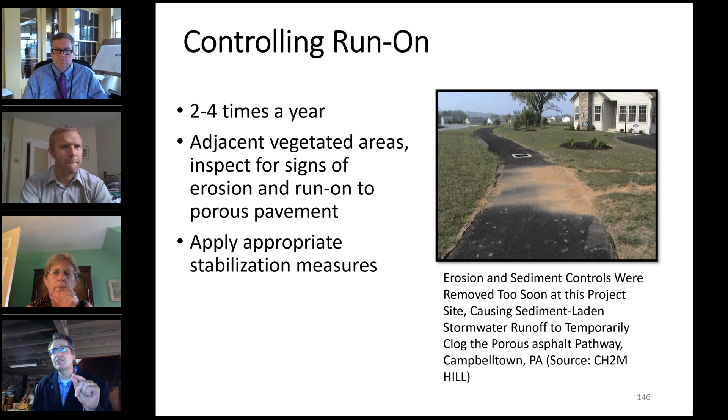I want to end with maintenance, because one of the biggest things is the advance in sweeping technology. We had the privilege of being a testing site for this new high efficiency vacuum sweeper. It's called Triveris. There's other vacuum sweepers out there, like Stormwater Compliance, out of Falmouth, Maine.

They call theirs the regenerative... the RVP something. They have their own system. These are really high efficiency sweepers, and they're pretty amazing. They've restored my faith that at least we can regenerate long clogged infiltration capacity of pervious pavements.

This has a high efficiency vacuum jet on the front. And I'll just play this video real quick.

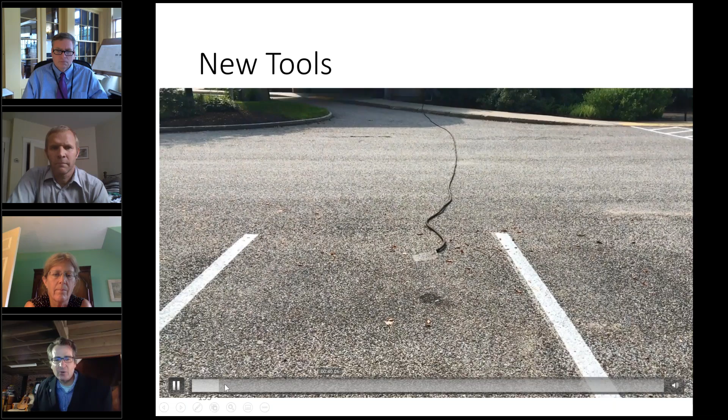Okay, here we are at the Elliott Alumni Center. Can I fast forward it? Okay, yep, doing our cleaning. So I'm just showing you initially - this is the runoff from a clogged pavement.

Time of concentration about 3 minutes and 20 seconds - 3 minutes for the water, which is not infiltrating, to make it all to the drain grate, which again we add as belts and suspenders. Not much - so there's the Triveris.

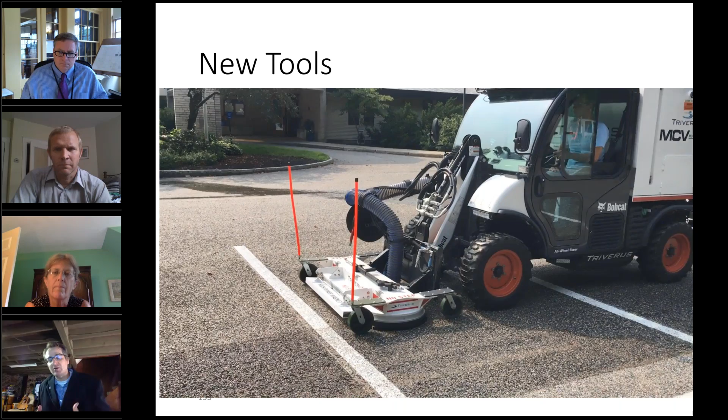This has a high efficiency rotating pressure washer on the front and a high efficiency vacuum on this aperture that you see. There's the jets, the circulating jets. Really, really impressive. And this is afterwards - same hose, same infiltration rate, and essentially that's the limit of the flow.

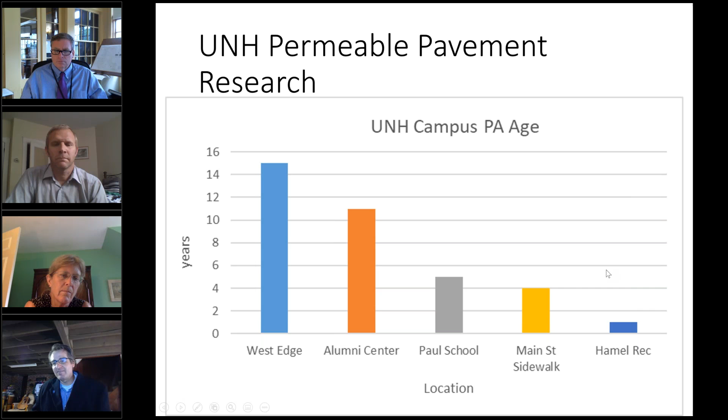So then obviously we took data. I'm showing here, we find a broad range of age of pavements at the school, and the age of pavements is almost proportional to the infiltration rate. Oldest on the left, newest on the right. If we look at infiltration rates, it's almost the inverse.

Anything below 10 inches an hour we're considering failed, because the method we use is C1701 - an ASTM method for porous pavements - and there's some leakage out of just the equipment. You can't get 100% leakage. So 10 inches an hour is basically clogged.

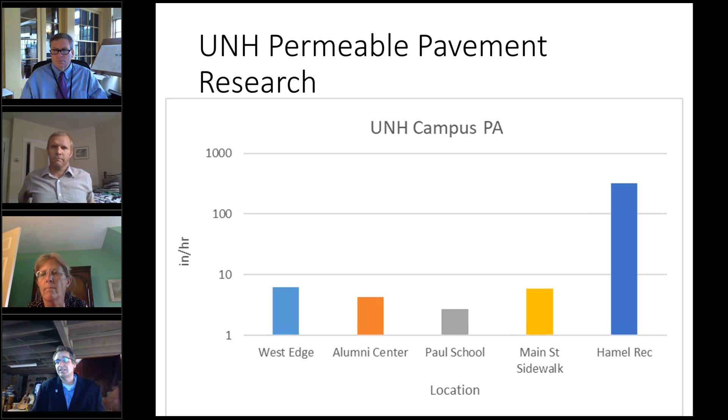All right, I'm going to end there because I think I'm out of time. I apologize for issues in the beginning, but hopefully I will stay around if folks have questions, and I'll feel free to answer them. Thank you for your time and attention, and hopefully this was useful.

Any questions? I have one question here on the porous pavement. How expensive is maintenance using the Triverus, and would you reconsider the use of porous pavement with this equipment?